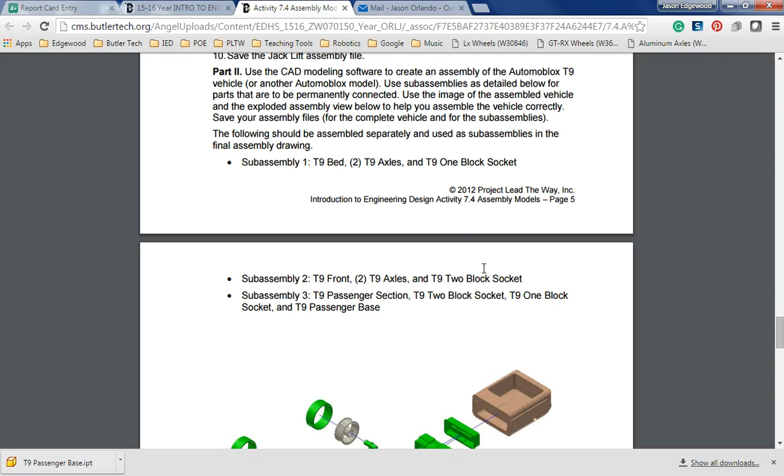So let's head on over, and that's not what you want to see. You go back to Inventor. Okay, I've already hit New. I'm going to start an assembly file again. Again, make sure that you've got all these part files in the right folder so you're ready to go get them. So place, I'm going to bring in the front as my base component, the component we're going to ground. So let me find it here, front.

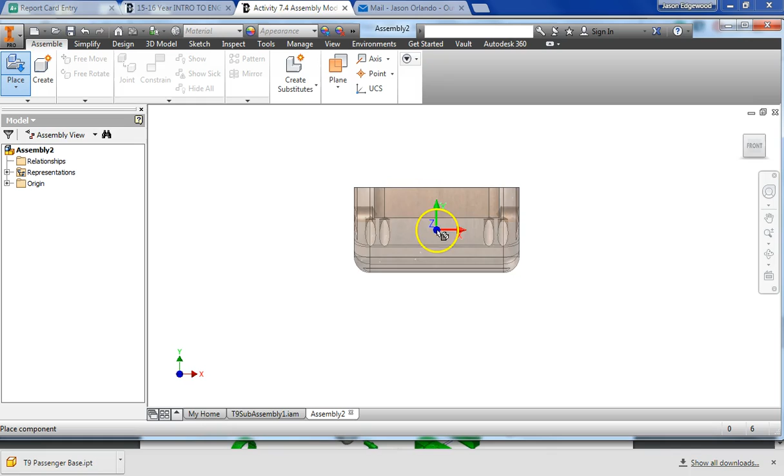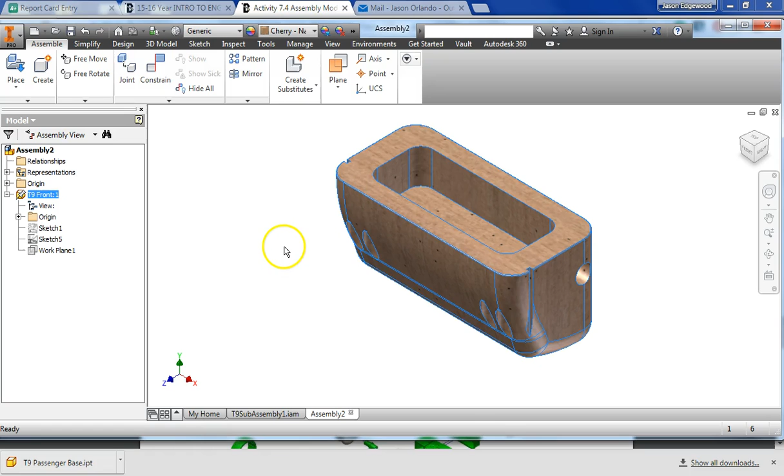Okay, that piece, open. So again, to bring in a base component that is grounded, I right click and say place grounded at origin. If you didn't do that, just remember that you can come over here in the browser and right click on the part. You can find grounded. Yours will be unchecked. Simply select it and it will then be checked. And once you check it, you will not be able to grab it and slide and move it.

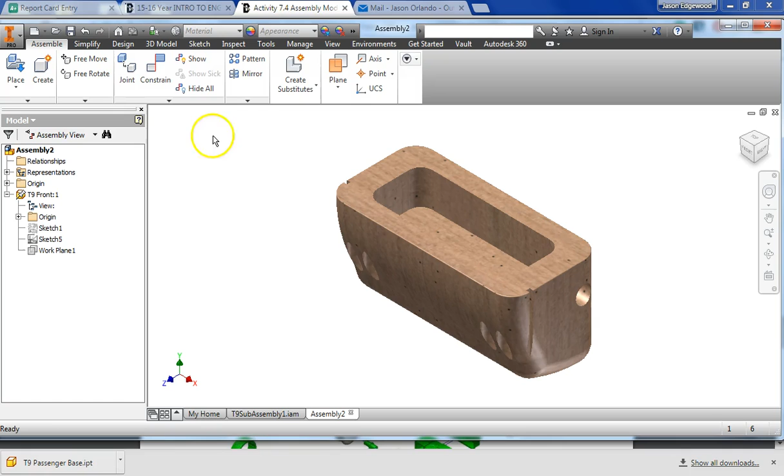Okay, so being able to click with your left button and move it is different than using your wheel as a button and panning. Okay, so that's different. All right, so I won't rearrange the views right now. Let's just get to it. So let's go ahead and bring in our other axles. Let's see here. Where's the axle? I need 2 of them. So it's going to be 1, 2.

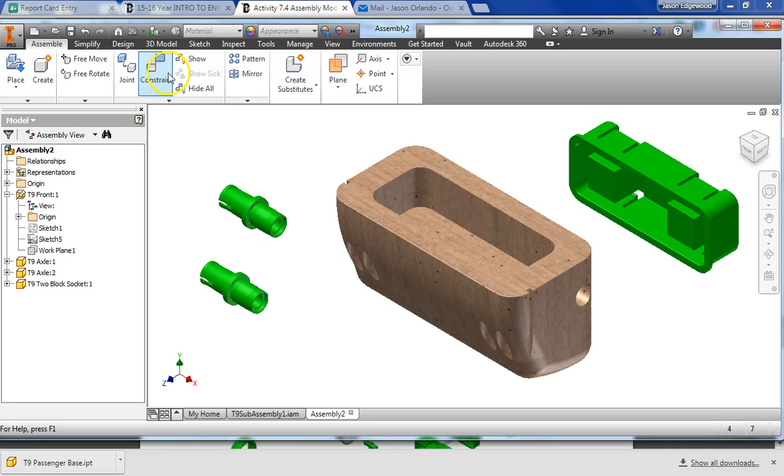Right click and OK. And then we need the 2-block socket. So let's come in here and look, 2-block socket, that piece right there. Open, I need 1 of those. Right click and OK. All right, so do you remember how to do the axle? There's 2 different ways. I'll do both again. So I'm going to do constraint. I'll start with this opposed mate again, and I'm going to grab that axis. Nope. There it is. And then I'm going to get this axis here.

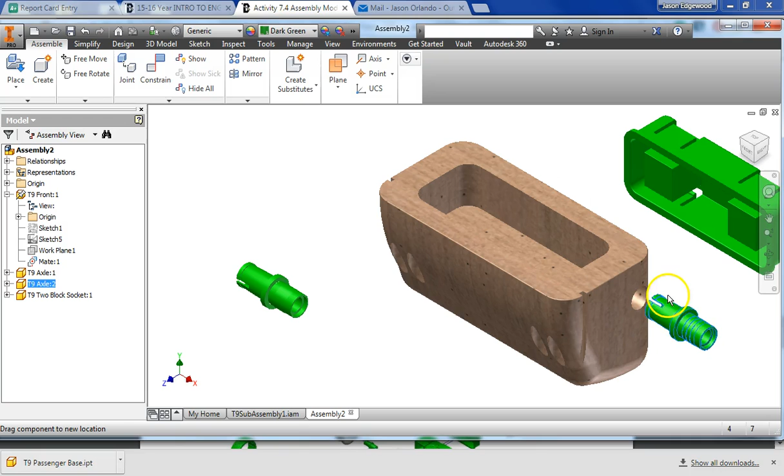I'm going to hit apply, and I'm going to close just so I can come grab it and move it. And you may be thinking, oh, Mr. Orlando, that's backwards. Look at that. That part with the little tabs is supposed to be sticking out. That's right. Well, what happened is I only aligned the axes. And so it doesn't really know if it wants to be this way or the other way. I can actually spin it around and put it over there, but I'm going to stick with this hole. It took 2, if you remember last time.

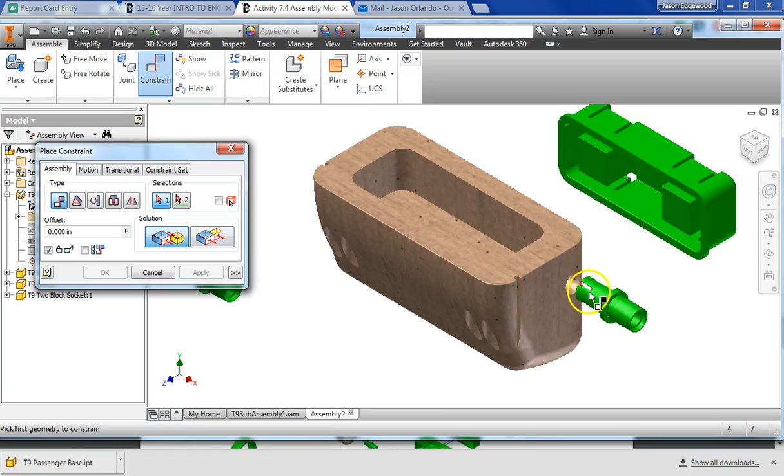So this time I'm going to use another constraint. I'm going to use opposed mate. The axes can be aligned if I flip this around 90 or 180 degrees. And I'm going to do that by using my constraint tools. I'm going to take this face, that lip, and I'm going to oppose mate that face to the side of the front. Hit apply. Close my box so I can grab it. Look at that, it works. I can't pull it out. Oh, but the spinny thing again.

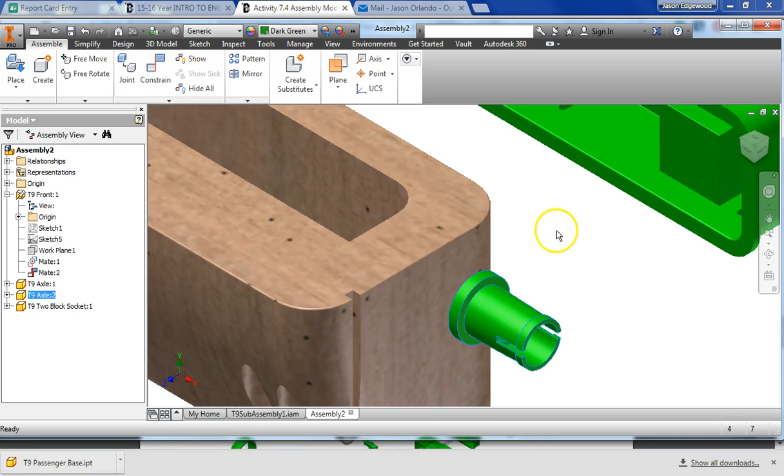Okay, well, let's fix that. That was an angle constraint, this type. And I'm going to grab that little flat surface right there. It gives me a flat surface to grab. And how about we just use this flat surface? I need a third. I need a reference vector. So I'm going to get that one. It was somewhere. There you go. I don't know if you can see that, but I'm getting that edge.

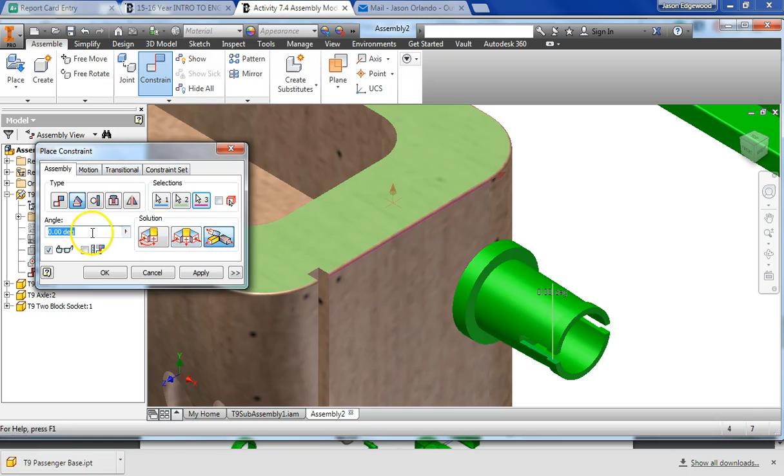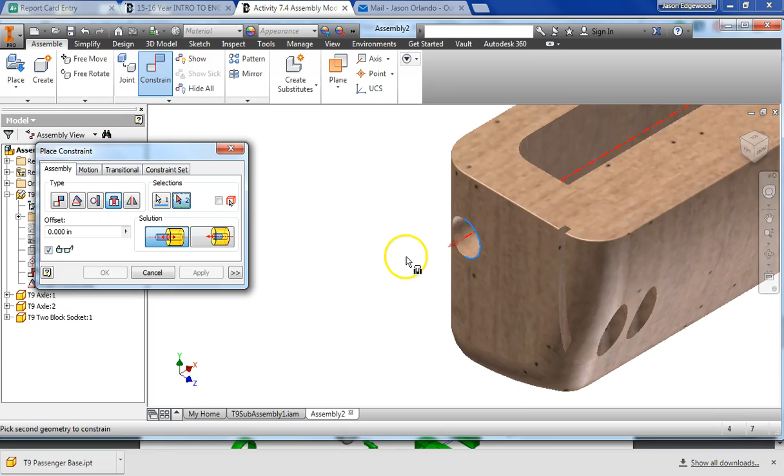Select that. I can change the angle. You can leave this one at 0 degrees if you'd like. Close that. Test it. Grab it. Oh, it doesn't move. It doesn't spin. It's perfect. Okay, let's rotate and repeat. So constrain. This time let's use the insert tool. I'm going to use the oppose. Notice that arrow's pointing out, and I want to get the part that's going to point in right there. Boom.

Oh, that's not what I want. Notice it's sticking out. Well, there's actually an offset tool. Let's try this. 0.50. Nope. Let's try negative. I'm just showing you another tool. Oh, that's too far. How about negative 0.3? Okay, you could sit here and tinker with that dimension. If you knew the exact dimension, you could get it precise, to get these axes aligned and get those opposing and be exactly perfect.

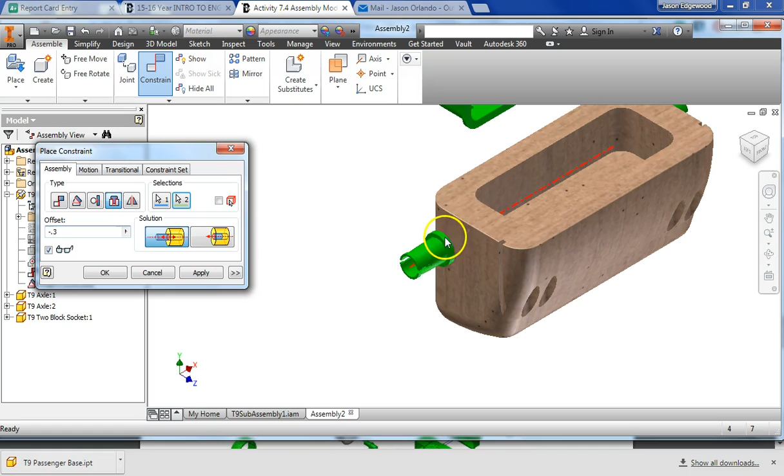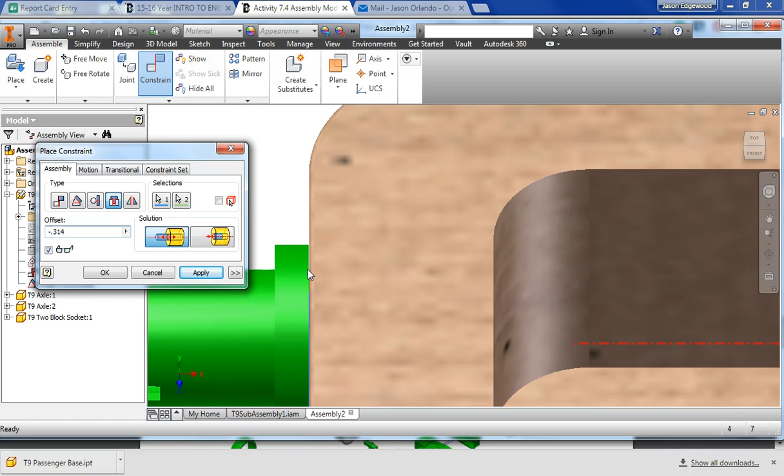I'm guessing I am not perfect right now. See that? So you could spend some time tinkering. Oh, that's maybe too far. 0.31, not far enough. 0.315. 0.314. Oh, see that little bit of white? Okay, so you could do that. That is a tool, something you can play around with. I'm going to hit cancel. I'm not going to accept it because I'm going to show you if I'm a little more careful when I choose. So I had insert, and we've got that axis. Rotate around.

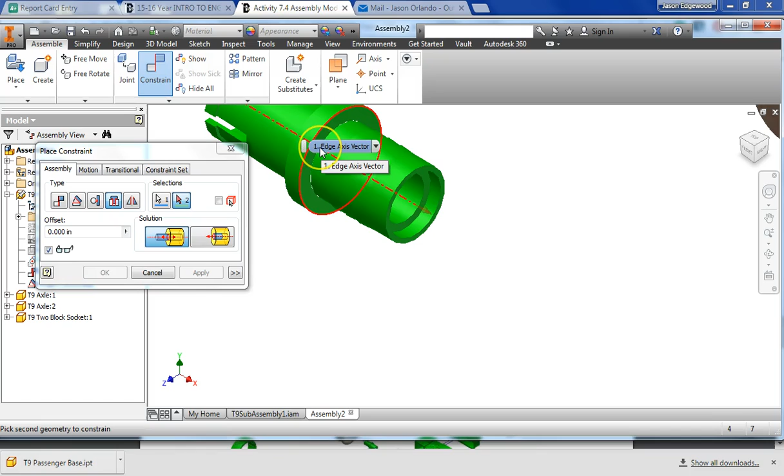Okay, and then this one, notice, remember there's different circles here. If I go ahead and get a circle that's already in plane with the circle that I selected when I chose the hole, then I'll have it. So either the little one or the big one, either way, those are concentric and they're coplanar. Hit apply. This one should be good.

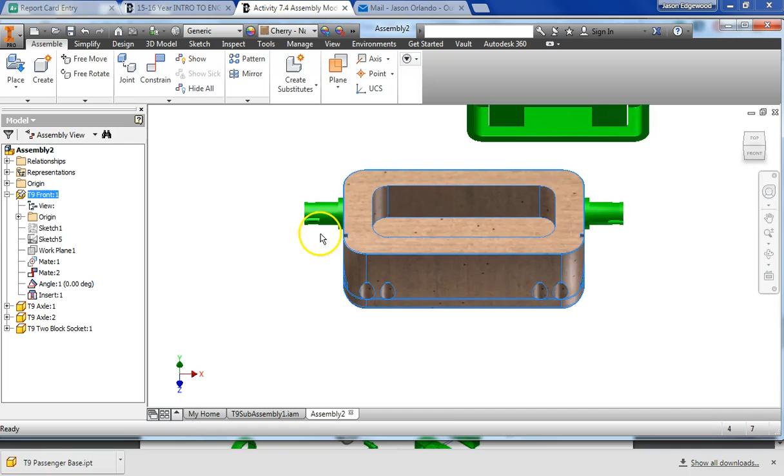I'm going to close this, spin it around. Okay, I'm probably going to have to fix the spinning motion. Yep, okay, but it's good. It's right where I want. If I look orthographically, okay, we should not see any light in between there. Perfect. Okay, so you want to lock that down so it doesn't spin.

Constrain, an angle constraint. We're going to choose the flat surface right here, right there. Zoom out. I'm going to choose this surface right here, and then I need a reference vector. I'm going to get that edge. And again, change the angle if you want. Want to make this one 90? Want to make it

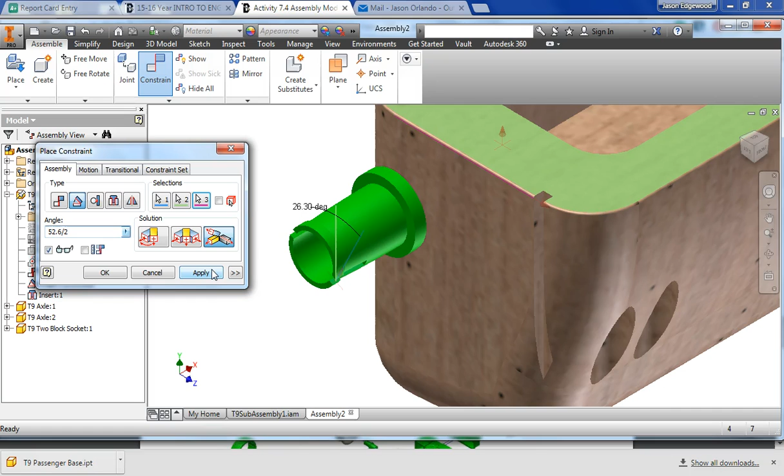52.6? Whatever you want. You want to make it a formula where it had to do some math and you knew, oh, it has to be half of 52.6. You could do 52.6 divided by 2. Inventor loves math. Hit apply. Okay, you can do it. I'm not really worried about it. I'm guessing that in the factory they just randomly stuck those things in with a dab of glue on it and didn't really pay attention to which angle it was at.

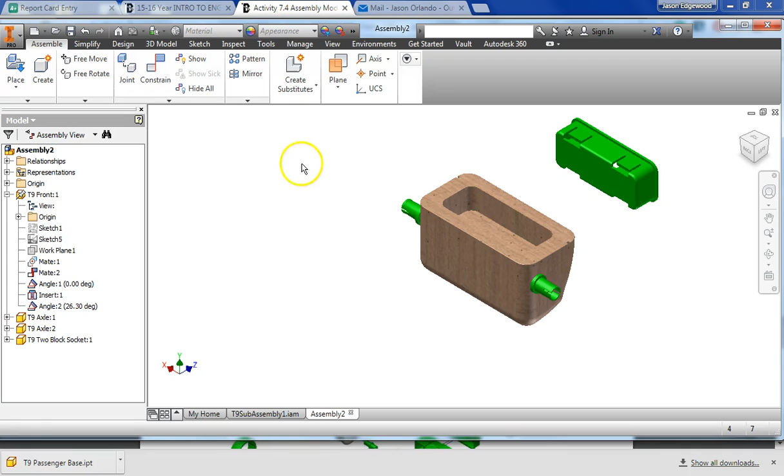Okay, so let's spin this around and we're going to get this 2-block socket in. Right now, the way it's positioned, I'm going to go ahead and grab this. That is going to mate, oppose mate, the back of the inside. So constrain this mate and oppose mate. It's already selected. That's kind of the default. Right there. Hit apply. Close that. I like to close this so Inventor doesn't think as I come over here and grab and select things that I'm trying to pick another object to constrain.

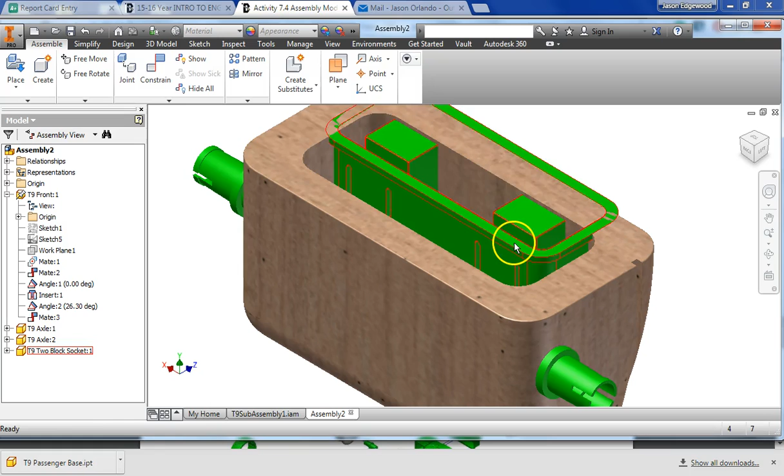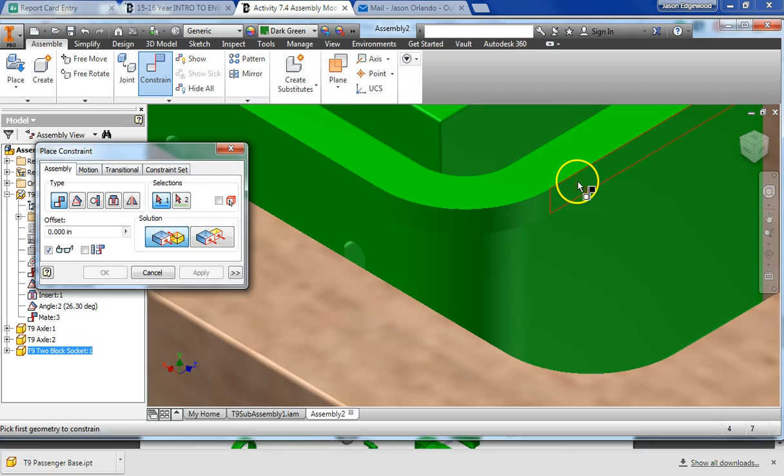Okay, so it's stuck on the bottom, but it moves around. And notice again, there's that little lip. And so make sure you don't grab the side here, but get that little lip because that protrudes a little farther. If you constrain this part to the wood, then this lip has to go into the wood. Okay, so let's do a constrain, and I'm just going to use my oppose mate again as the easy one. So that, we need to rotate around. So we can grab that, boom, hit apply, close that again so I can test what happened.

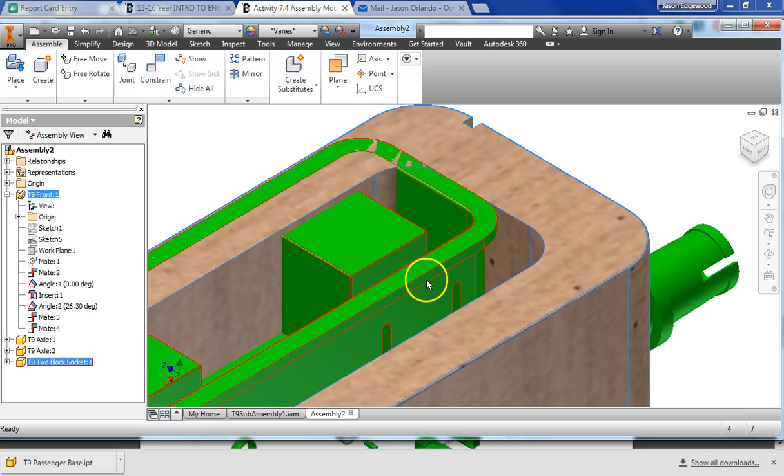So you notice that it doesn't pull off of there. Okay, it's not coming up. I can't pull up, bring it out of the block, but it's sliding this way. So I need one more constraint so that it locks down this way, right? So I don't want to be able to move this way. So let's go ahead and grab that little lip again. Constrain, oppose mate. I'm going to grab that. I'm going to rotate, grab the inside of that wood, hit apply, close, and we are done.

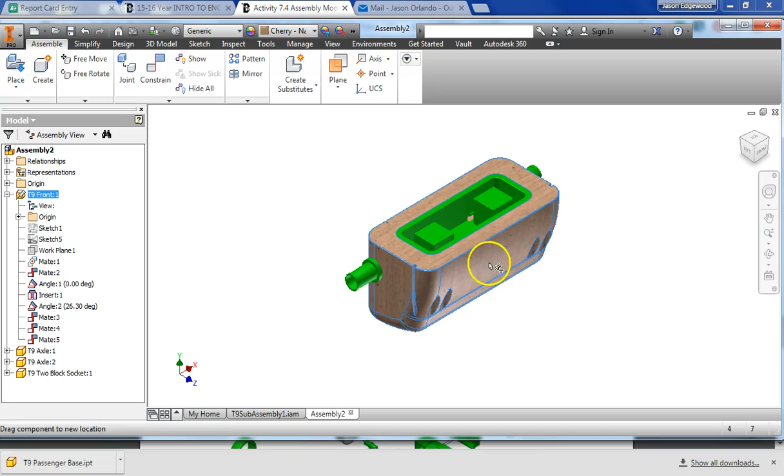Grab it, move it, test it. Nothing moves. Okay. That doesn't move. The whole object doesn't move. It is done. That is sub-assembly number 2 complete. Just double checking. There wasn't another part, was there? Sub-assembly 2. The front, 2 axles. The one. That's it. All right. So you've got that done.

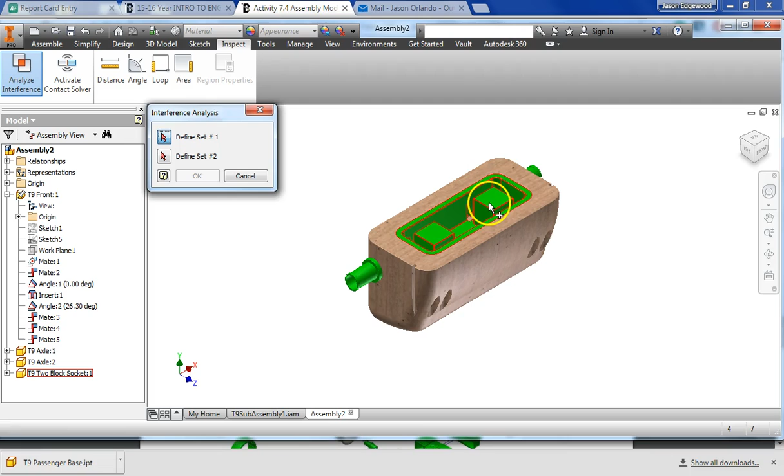If you want to play around with inspect again and analyze interference, you can do that. You can test, hey, how well did we manufacture these parts, design them? Part 1, part 2, do they fit nice with no interference? There was no interference. Perfect. Yes. Curious. How about the axle and the body? Hit OK. Oh, the exact same.

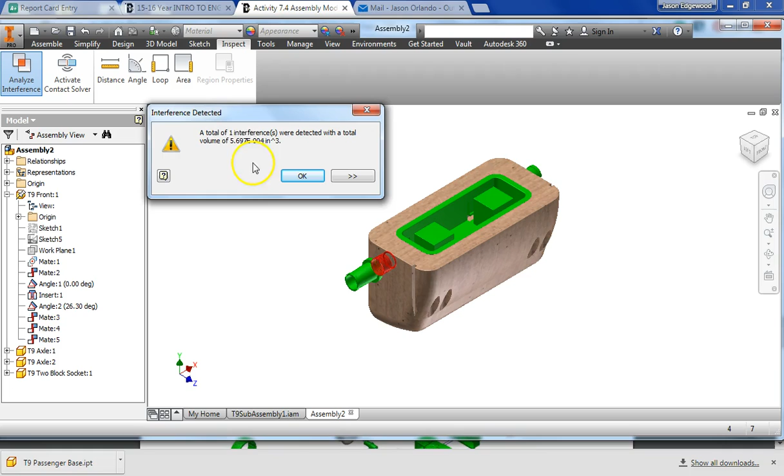So an extremely small interference. That's perfect. It's an interference fit. So small that it should still go in without needing a whole lot of pressure. You know, not a lot of elbow grease required to push that in, but just enough that there's a little bit of friction and it's not just going to fall out, you know, as the glue dries. So perfect. All right, there you go.

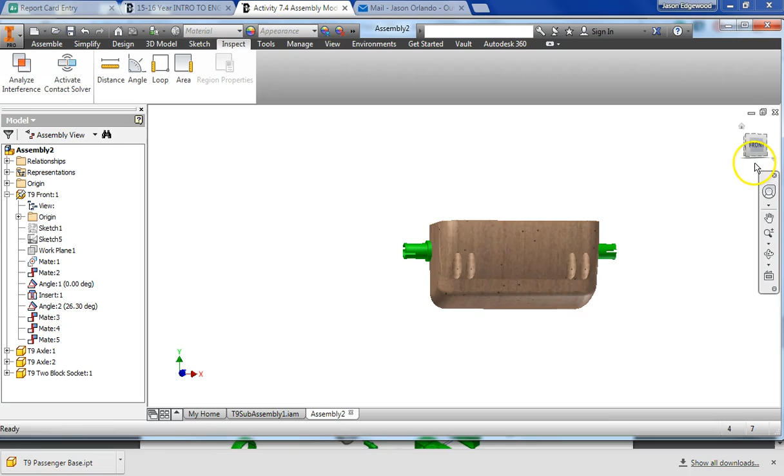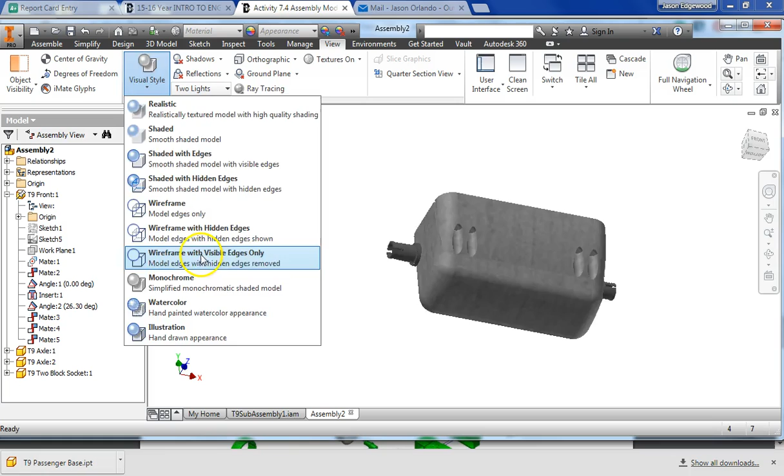If you want to play around with reorientating that, you can. You can also go to View and Visual Styles if you want to look at this in a different model, like the wireframe. Okay, you can play around with that. Illustration. I don't know if you've played around with this, but you can look at these and just take a look. That's a good one. Visible edges only.

Okay. So with the model edges, you get a lot of things that would be hidden. So that's a good view. So it doesn't get quite as busy looking. All right. Anyway, you're done. Great job.